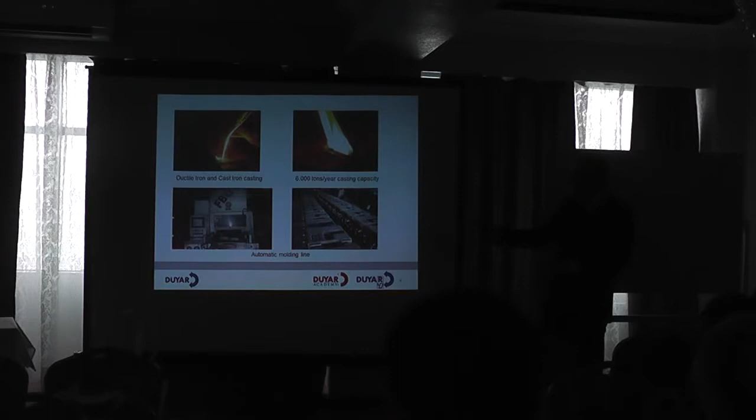This is our foundry. We are making ductile iron and cast iron casting in here, with a 6,000 tons per year casting capacity. We have automatic molding lines in there, a sand preparation system and a laboratory for testing. We are the biggest valve casting facility in Turkey.

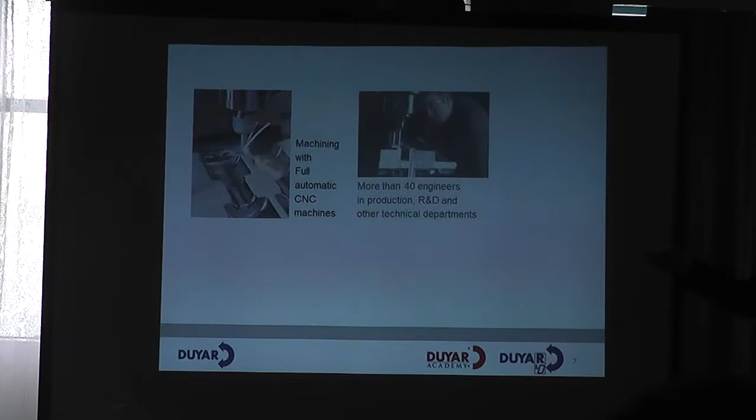This is our factory. We have 200 employees in here and our head office is also in this facility. We are making machining with full automatic CNC machines. We are working with more than 40 engineers.

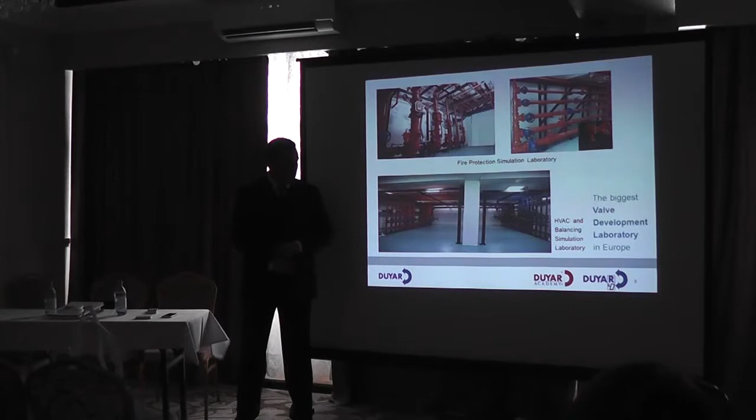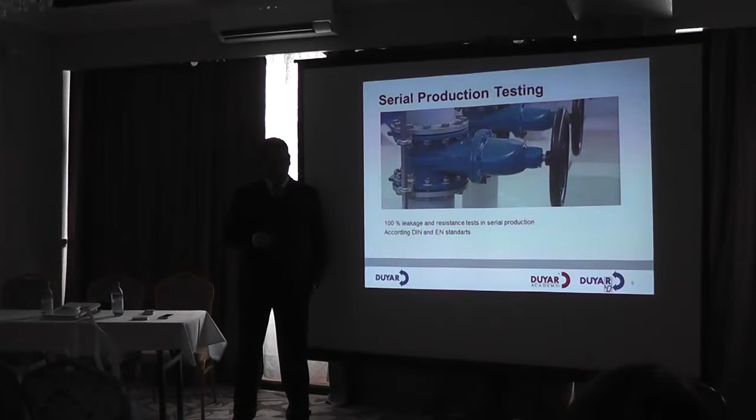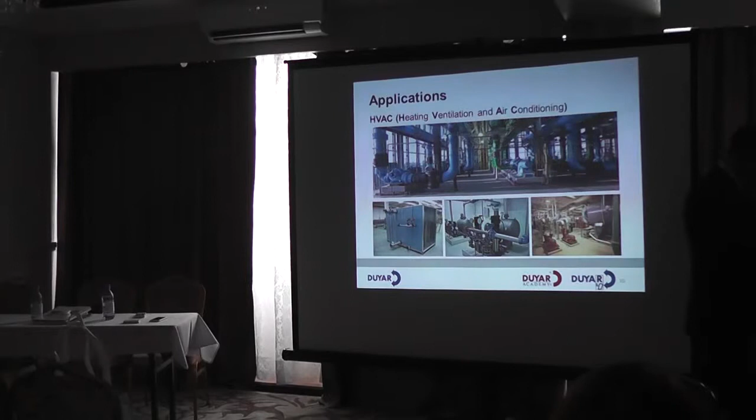And the second section is in here for balancing valves, which we are producing. We are making tests in there. Serial production testing. Each valve we are producing, we are making serial production tests to each of them.

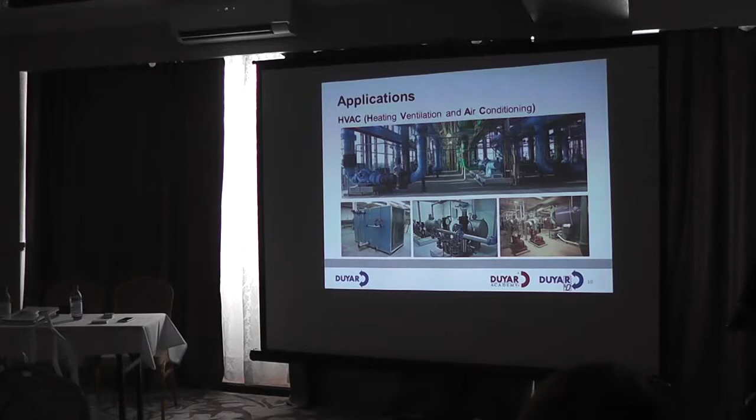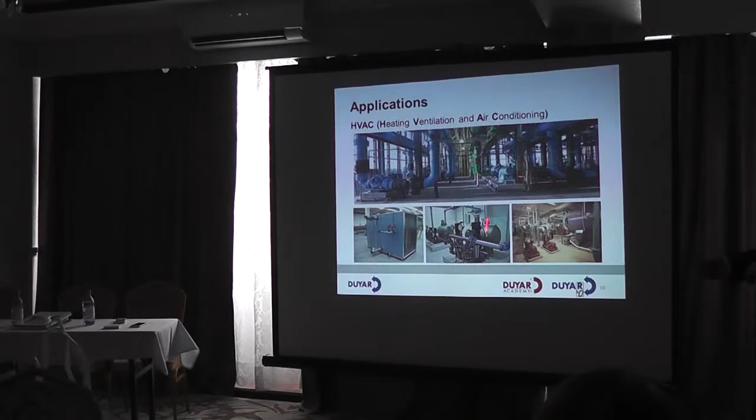If we look at applications where we are providing the valves, first is HVAC, heating, ventilation and air conditioning. From the pump stations until the radiators, because our product range is coming from half inch going up to DN600, it's quite a wide range.

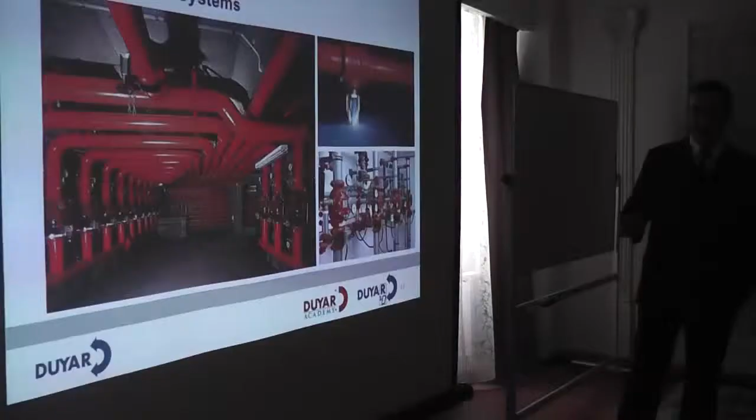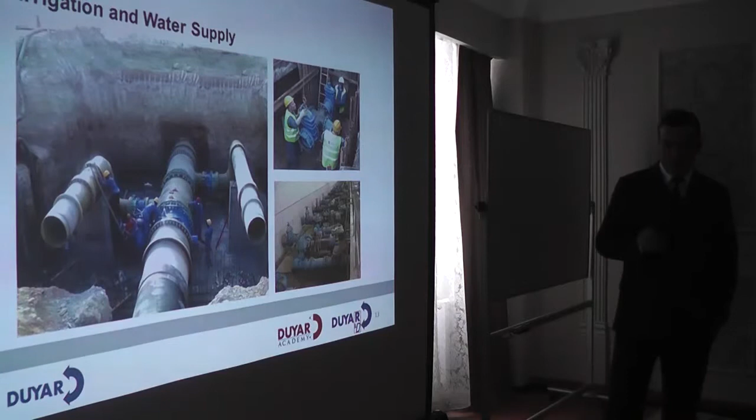Irrigation and water supply for underground applications, as here. Steam applications.

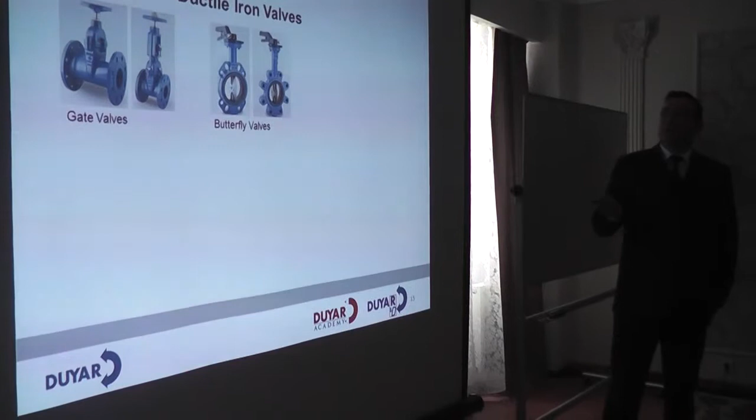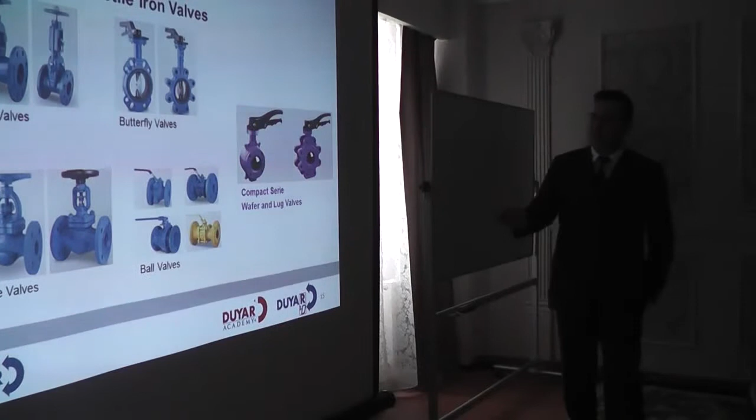If we look to product groups, it begins from gate valves, butterfly valves, globe valves, ball valves. We have quite a wide range of ball valves, and a compact series of valves. Wafer and lug type ball valves.

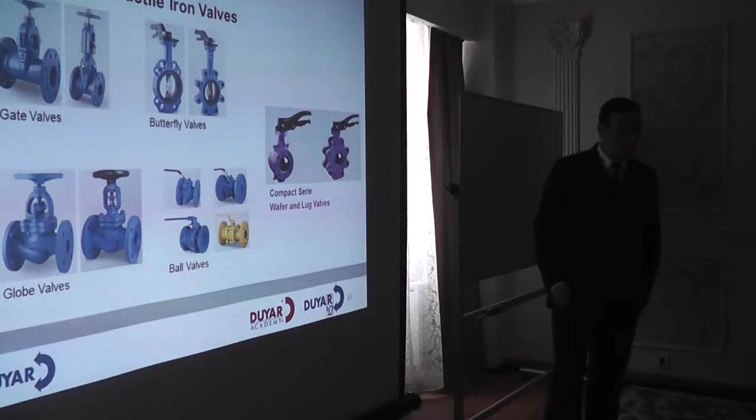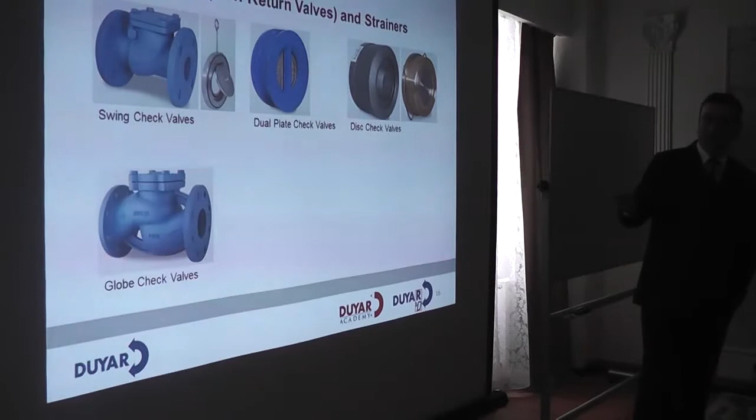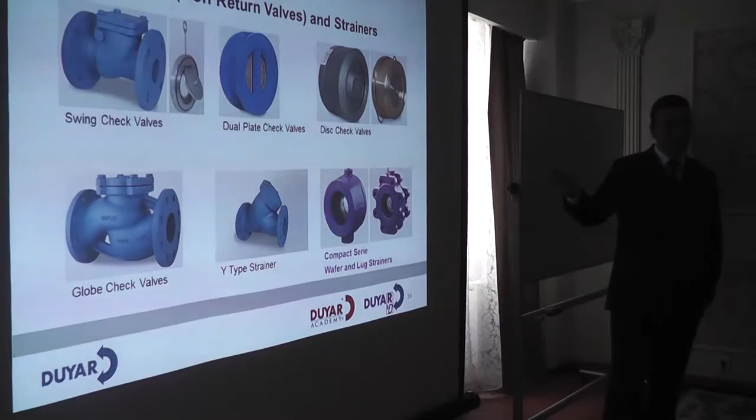Check valves, swing check valves, dual plate check valves, different kinds of check valves we are producing here. Y type strainer, filter, yes. And the compact strainer which we developed 2 years ago, and it's quite successful now.

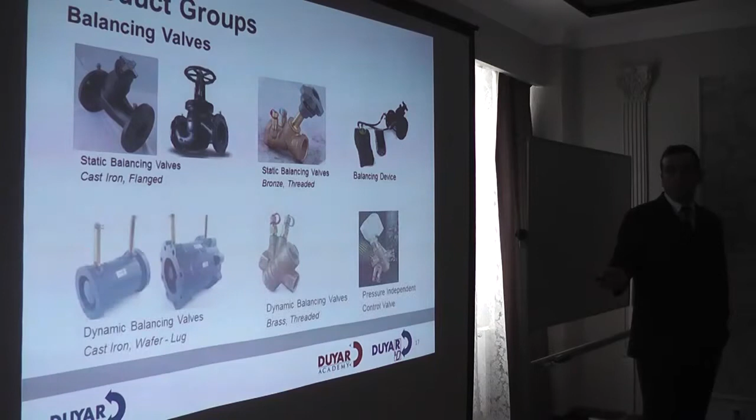Balancing valves. We are the first and only balancing valve producer in Turkey. Flanged and threaded versions. We have a device we are importing from Sweden to adjust the valve's flow rate inside. And dynamic balancing valves.